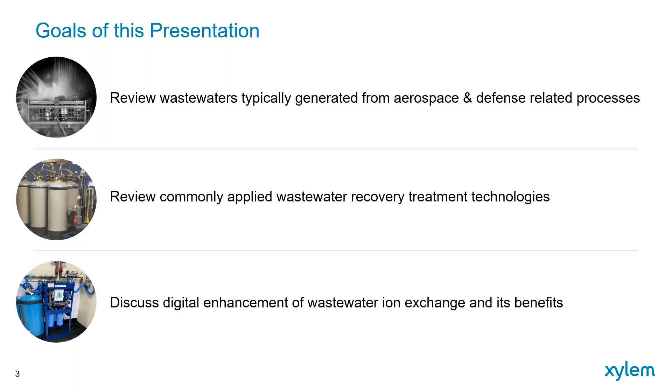So today, we're going to introduce Xylem and Evoqua. We're going to talk about where wastewater is generated in the aerospace and defense industries. We'll go into the recycling options for wastewater treatment and recovery, and from there to the digital connectivity platforms. Then we'll get a little deeper and talk about a few case studies and how we can implement these technologies and apply the digital aspect to it too. Finally, we'll wrap it up with a summary.

Xylem and Evoqua. Who is Xylem, and what can we offer you? How can we help you with your water needs? Back in May of 2023, Xylem purchased Evoqua Water Technologies, a company that both Chris and I came from, and this included our wastewater ion exchange services. With that merger, Xylem now has about 20,000 employees worldwide, and we provide water and wastewater treatment solutions, both services and equipment, to many different sectors. From aerospace and defense to microelectronics, power, and healthcare - really any sector with water needs, Xylem and Evoqua are able to help.

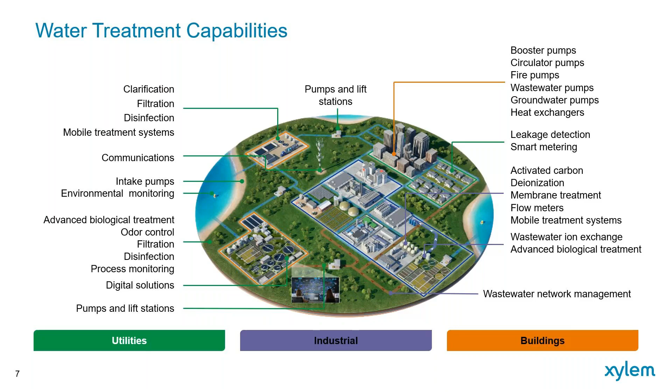I'll turn this over to Chris to get into the meat of the presentation. Thanks, Mark. Appreciate it. So we want to talk about some typical processes that generate wastewaters. We could have a whole webinar just on the different processes done within the aerospace and defense realm. We're going to concentrate on several processes that generate wastewater, use water, consequently dirty it up, and that wastewater then needs to be treated.

Metal finishing type processes are processes that you'll find very commonly within the aerospace and defense industry. Those processes can include electroplating, electroless plating, anodizing, etching, conversion coating, things we'll go into in just a little bit more depth in a moment here.

In addition to those typical metal finishing type processes, circuit boards are obviously heavily used within the aerospace and defense industries, and the manufacture and/or population of those circuit boards is also prevalent within the industry, generates wastewater, and is a target for wastewater treatment.

When you're dealing with a lot of metal parts, whether you're doing metal finishing, whether you're forming those parts, whether you're manufacturing them in some certain way, ultimately these parts, whether they be metal, plastic, or glass, they ultimately need to be cleaned. So cleaning in general and critical cleaning especially are heavily prevalent within the aerospace and defense industries.

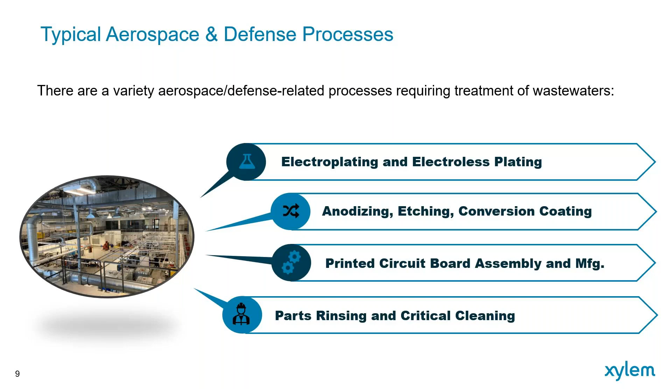Looking at metal finishing, which would include, for my purposes, electroplating, electroless plating, anodizing, basically those types of processes where you're depositing a metal coating onto a part, or you are affecting a change in the coating on the metal part, in the case of anodizing, for example.

Those processes involve a lot of different chemistries and heavy metals. In the aerospace and defense industry, you see a lot of use of cadmium, chromium, copper, nickel, zinc. There are several others as well, but those metals seem to be prevalent in many of these different processes, on the plating side, whether it be electroplating or electroless plating.

On the anodizing side, you're taking aluminum parts and actually changing the aluminum coating on the surface for better protection. There are three different types. One type uses chromic acid for anodizing, and the other types use sulfuric acid typically, or some combination, for conversion of this aluminum surface.

On the conversion coating side, you see a lot of chromate, which is hexavalent chromium, phosphate conversion coatings, and non-chrome coatings, which are meant to try to replace some of the hex-chrome coatings just because of toxicity concerns and wastewater treatment concerns.

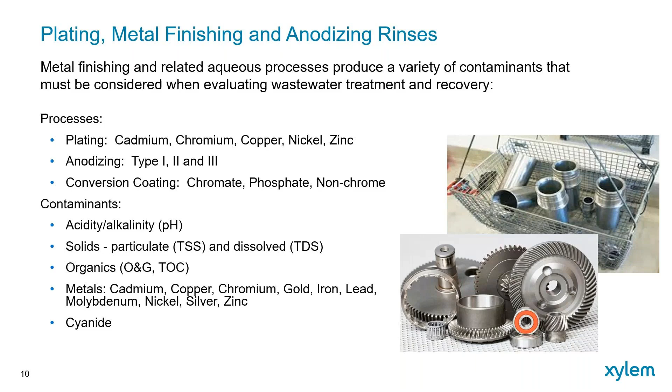Now we're going to talk about circuit board and critical cleaning rinses. That's where you have these assemblies, parts, or circuit boards that need some critical cleaning done to them. What is critical cleaning? It means they are cleaned to a high degree to minimize the amount of contaminant or soils left on them, contaminants that could actually impair how they operate or cause their useful life to be shortened.

Processes that we encounter on the cleaning side, for circuit boards as well as other critical cleaning applications, include immersion processes, spray processes, and ultrasonic cleaning. These processes are usually contained either in a batch or inline continuous type washer, where you'll have almost like a dishwasher in some cases, or a several compartment type washer with a washing stage and one or more rinse stages.

Contaminants that are generated from these would be solids, particulates, dirt, dust, debris, flux residue, things of that nature, and dissolved solids such as dissolved metals: lead, silver, tin, zinc, copper, things of that nature.

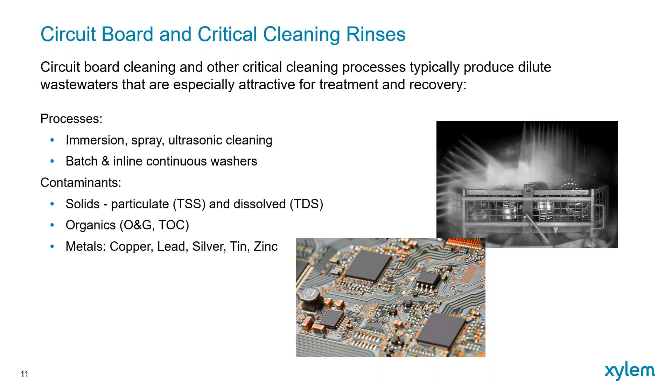So when we're thinking about water recovery, we want to understand why we want to do it, as well as just diving right into doing it. Many times, if water recovery processes are done strictly to save money on the water bill, you may end up being disappointed, depending on what part of the country or world you're in, especially depending on water costs and things of that nature. So you really have to think about why do we want to do this.

What do we want to do? Big goals of water recovery: you're trying to improve your sustainability profile. There may be a goal from corporate headquarters or facility management to cut back or reuse a certain amount of water in your processing. So improving that sustainability profile can be a goal.

You're also maybe trying to comply with local water volume or consumption restrictions. Your local water folks may say you can only have so much water for your facility, and if you're trying to expand or add new processes, you may run into a bottleneck where you can't get enough water. So you need to look at water conservation and/or water recovery.

If you're looking at compliance considerations, you can have both positive and negative effects of removing wastewaters from your overall wastewater stream that is being discharged. We'll talk about that in a little bit on a couple slides.

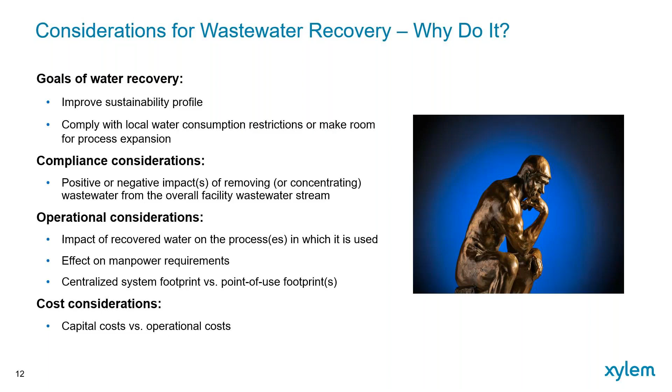How clean is clean? You want to look at the effect of manpower requirements, and you also want to look at centralized systems versus point of use. Do you want a number of systems at point of use locations, or could you consolidate into a centralized system that can feed out to the various points of use? And then again, there's cost considerations—capital costs versus operational costs for these types of systems.

So when we're looking to proceed, we want to think about what we're going to do. We're looking at doing some wastewater recovery. We want to identify any drivers and constraints, what the priorities are—it goes back to what I just talked about. What are the goals? What are the reasons for doing this? Do you have priorities for water, energy, or chemical consumption reduction?

Do you have any restrictions in money—capital expenditure versus operational cost? And do you have any corporate or facility sustainability objectives that doing this would help you achieve?

So you get past that, you say yeah, we want to look at this further. We want to determine where any water that you recover could be used—in other words, what impact it might have on whatever process it's going back to. So what processes might you be able to use that recovered water in—the exact same process it came from? We see that most often, or other processes within the facility, like cooling tower feed, could also be a consideration.

Then you have to understand what water quality you need from this recovered water for those processes, and what volumes and flow rates are required for those applications. So you end up doing a water balance, shall we say.

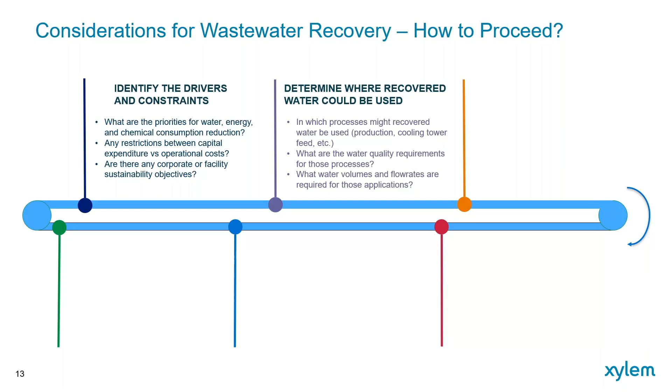Then you take it to the next step and look at the existing wastewater streams. What processes generate wastewater? What are their volumes and flows? Are they commingled or separated, segregated? Can you segregate them if required? Sometimes that can make the treatment process much easier.

Then you've got these target streams. Now you want to characterize them—look at them, analyze them, determine the constituents and background chemistry of each. Are there commonalities between these different wastewaters that you could combine with no issues? Might any of the constituents be problematic for certain processes or potentially jeopardize compliance, for example?

From that information, then you're going to develop your solutions. What technologies are appropriate—we're going to talk in a little more detail on a couple of them. Do you want to look at point of use or combined recovery, or both? Depending on the types of processes, do you need to do bench or pilot scale testing? Typically, we always recommend bench testing, and we do that at our facility in Minnesota.

What is the footprint for each required solution? What are the anticipated maintenance needs? What levels of controls and alarms do you want? Do you want to integrate with your building management system?

In the end, in goes the solution. That doesn't mean your work's over. Now you look at it and say, okay, is it delivering the expected results? How can we optimize it? If need be, can we expand it?

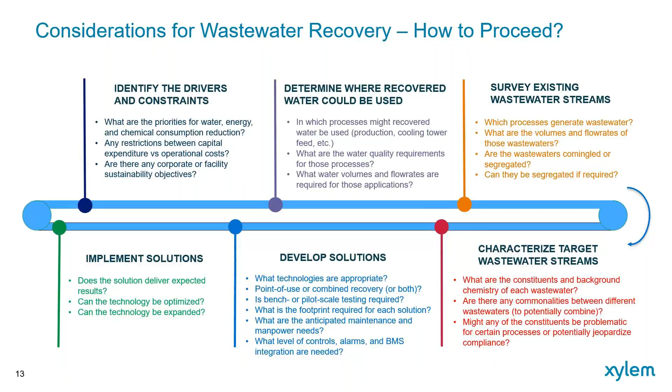All right, let's talk a little bit about wastewater treatment and recovery, and what options exist for wastewater recovery. We'll hone in on a couple specifically, or a few.

There's ion exchange resins, which take out metals and/or total dissolved solids. Carbon filtration, old as the hills technology, just like ion exchange, can remove organics and total organic carbon. Reverse osmosis, a membrane process, can remove total dissolved solids. Good old filtration, whether it be by media, bag, or cartridge, can take out particulates or solids that you don't want to get into your following processes, such as ion exchange, carbon, or reverse osmosis. And ultraviolet light is used to control organics or control bacteria.

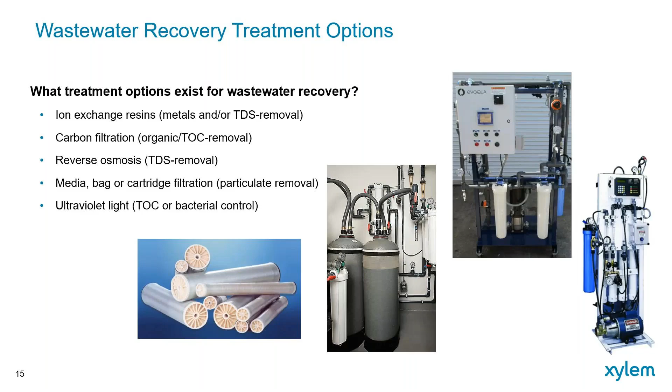Let's talk a little bit about ion exchange and carbon. It's a very old as the hills technology, very common. Ion exchange resins are just really small plastic beads that are functionalized. They're meant to hold on to one ion, and when you run your wastewater through it, it exchanges the ion it's holding on to, such as acid or hydroxide in this diagram, for whatever contaminants are in the stream. That diagram indicates copper sulfate going through cation resin and anion resin. The cation resin removes the copper, puts acid back into the water. The anion resin removes the sulfate, puts hydroxide back in the water, and the result is purified water.

So the resin will remove dissolved ionic contaminants. It'll take metals and other contaminants down to ppb levels, and you can produce some pretty high quality water with ion exchange resins, up to 18.2 meg, or just call it 18 meg. There you're talking TDS, total dissolved solids content, of about 0.03 ppm. So pretty darn pure. Carbon adsorption is used really to remove organics, TOC, and can also remove oxidation compounds such as chlorine or hydrogen peroxide.

You'll see ion exchange and carbon used both on the front end of processes, to clean up water before it's used in the process, and on the back end, to clean up water after it's been used in the process.

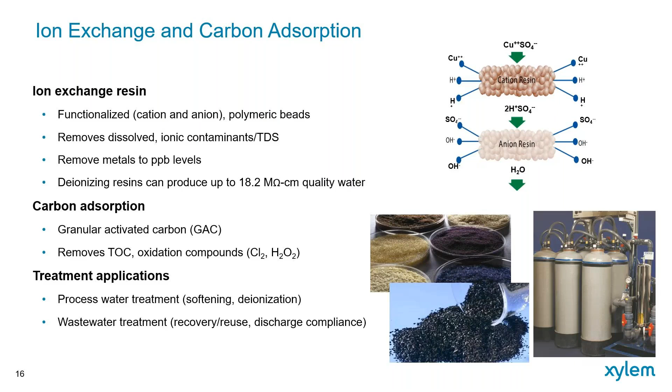Reverse osmosis is another common technology. It's not as old as the hills, but pretty darn old, been around for a while. It uses a polymeric membrane - basically a physical barrier. It's a separation process. You can see in the diagram up top, your water goes in, you apply pressure, and it forces the clean water, if you will, plus a minor amount of constituents, through that membrane, and that comes out as your product, or what's shown there as your permeate.

The membrane doesn't allow certain things to pass. The majority of your contaminants, for the most part, will not pass through that membrane, and those concentrate up in what is called the concentrate or reject stream. Membrane pore size is extremely small on these membranes, such that it can retain ions such as sulfate and chloride and things of that nature.

RO will remove most TDS and other contaminants. It'll take out typically about 95% of the total dissolved solids, up to 90% of organic carbon, up to 97% of silica, and virtually all bacteria. Again, you end up with a clean stream, the permeate or the product. It could be 10 microsiemens or even under, depending on the quality of water going in. And you have to remember you do or will have a concentrated or dirty stream, the reject stream, that may or may not need to be treated.

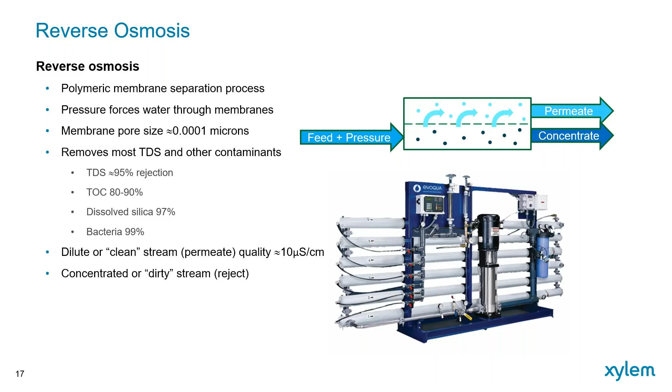There are other filtration type processes, speaking of membranes, that are used in wastewater. Microfilters have a larger pore size - large is in quotes in this case - about 0.2 microns. Usually a microfilter is used as a pre-treatment step for reverse osmosis or for ion exchange recovery. Microfilters can be used to replace clarifiers, for example, if you have a conventional precipitation system.

On the ultrafiltration side, ultrafilters have membranes that will filter down to about 0.02 microns. They'll remove turbidity, particulates, bacteria, pathogens. You'll see a lot of these in some oil and grease type separation applications, and again these are usually used with disinfection technologies for water recovery on the potable side. We don't see them as often on the wastewater side, but they can be used and ganged up with other technologies.

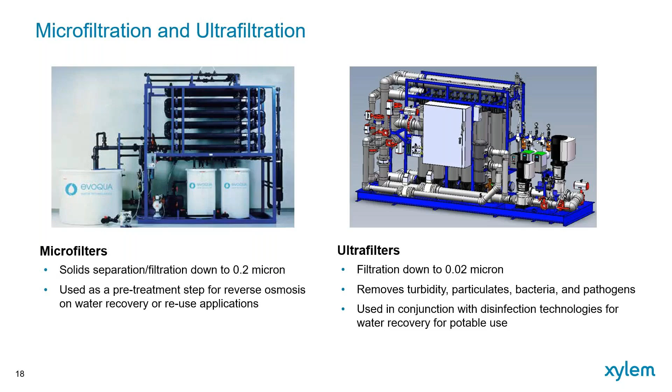Filtration and UV or ultraviolet light treatment. Filtration removes the solid particulate contaminants.

You can see there you've got cartridge filters. You may be able to use bag filters or media filters, which was shown in those tanks in the upper right corner of that picture, where you actually have material or media equivalent to sand, or perhaps even finer, that filters out particulate contaminants, and then those are removed via backwash. Filtration is important because it keeps those things out of your ion exchange resin, out of your reverse osmosis membrane, out of your carbon adsorption media as well.

Those things, ion exchange and carbon, they can work for filtration. You do not want them to, because whatever you put in there is ultimately going to come out the backside and cause problems, if they don't cause problems just by plugging those things up. So filtration ahead of IX or ahead of RO is typically a must.

Ultraviolet light, again, there's a couple different wavelengths you can use. That's usually to break down TOC or to break down biological activity. When you do use UV, you usually follow that with a submicron filter, trying to get out those very fine particulates or microbes that have now been dealt with through ultraviolet light.

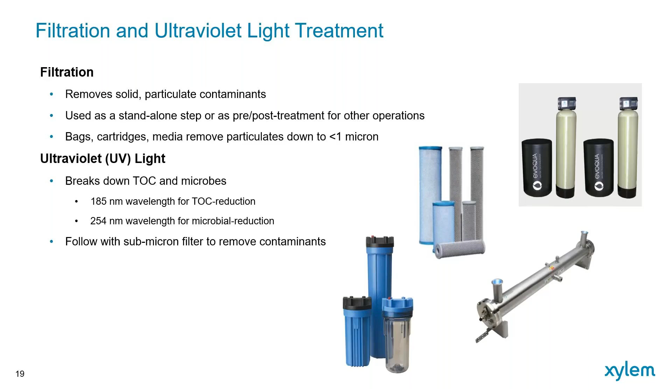So if we're looking at recovery or just wastewater treatment in general, there's some rules of thumb. Are we looking at media? When I say media, I'm talking carbon or ion exchange resin or something similar. When I talk equipment, I'm talking pH adjust systems, precipitation systems, RO, things of that nature.

So usually when you have high metals, high volumes, you're looking at an equipment type solution. When you're talking low concentrations of total dissolved solids, that's where media really shines. You're looking at pH or suspended solids, like I mentioned, you're talking equipment type solutions.

There are benefits, pros and cons, obviously, of any type of technology. Media, which we are focusing on really in this presentation, typically has lower operator attention required to interact with them, lower upfront expense when you're talking media type solutions, and usually a smaller footprint.

Doesn't mean media is the solution for everything. Equipment has its place, and oftentimes you've got a blend of equipment and media together to make the right solution. When it comes to dilute waste streams, however, media, ion exchange, and carbon are usually the best solution.

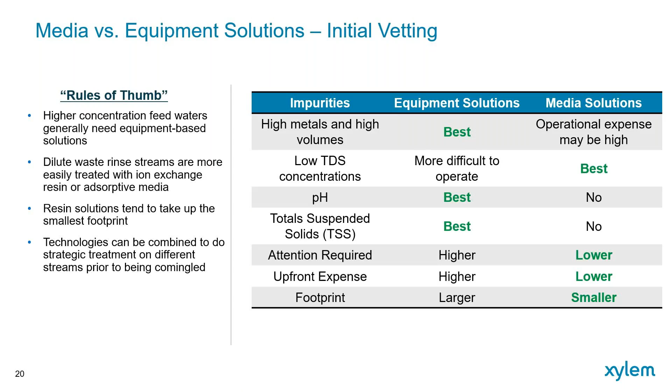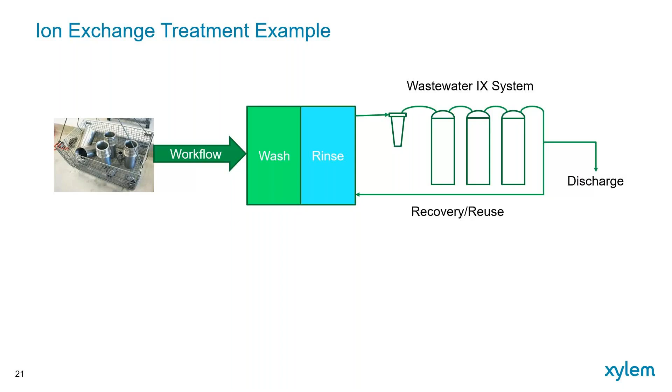So in this case, you've got wash and a rinse. Here's where you would employ wastewater ion exchange. You can do that either for recovery of that water back to the process, or discharge treatment if you need to do that as well for discharge to your local wastewater folks who will receive that wastewater and treat it further.

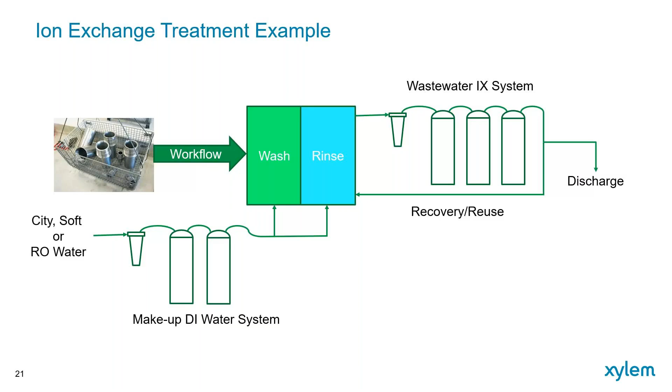When we look at ion exchange on the back end, you really need to make sure you're doing upfront water treatment as well. Upfront water treatment is common in so many different processes, especially in aerospace and defense, where you need a higher quality of water to be used in that wash process, in that rinse process. So here we just show a typical ion exchange makeup DI water system, and then a system on the back end to treat for either recovery or for discharge.

You would employ reverse osmosis similarly. Again, you've got to remember with a reverse osmosis, you do have the permeate or product stream, the clean stream that you would use back in your process, and you do have a discharge stream.

Depending on the type of water quality you need, as we talked about several slides ago, you need to understand what type of water quality you need going back into that rinse. Typically, whatever water quality your makeup system is producing, that's usually what you're going to want to see on the back end. Or that may be specified by a mil spec or something like that.

So if you have reverse osmosis, like I said before, maybe you're making 10 microsiemens water as your product. If you need to clean that further or make that even more pure, that's where you can install a wastewater ion exchange system. We can't, of course, forget about the discharge.

I mentioned before, there's considerations where you have to understand, if I'm putting in a process, what are all the outputs going to be? If there are metals going in that concentrate up that are now over your discharge limit, well, you might have to remove them. You could use ion exchange or a media type process for that, or you might end up with both things. So as you can see, there's a lot of different considerations when you're looking at doing recovery, water recovery.

There's a lot of different, not necessarily technologies, but iterations of those technologies that you could use to effect water recovery for your waste stream or waste streams if you have a combination, for example.

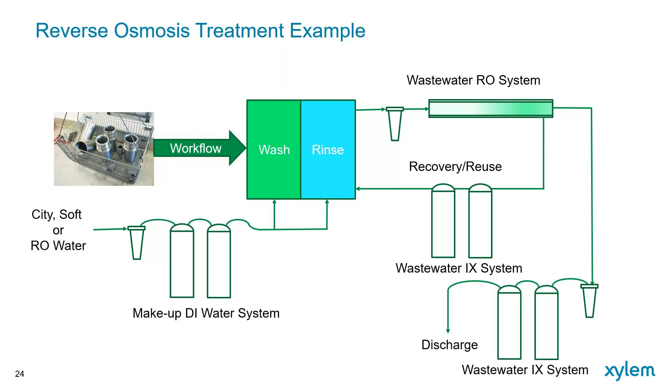Now let's talk about this digitally enhanced wastewater ion exchange. First off, when I talk wastewater ion exchange, what is it? From our perspective, wastewater ion exchange is a service where portable ion exchange vessels or adsorptive media such as carbon or other media are supplied for treatment.

These vessels are leased. They go onto the customer's site. The customer uses them, and when they are spent, they are removed from site and regenerated or rebedded off site back at our Minnesota facility. So wastewater ion exchange itself is this service-based system that uses leased media tanks.

Again, from our comparisons before, ion exchange or media type treatment does tend to minimize system footprint. In this particular case, you're eliminating any on-site handling or regeneration. Doesn't mean you can't use ion exchange on-site and regenerate it on-site—you certainly can. This is just a different iteration of that type of process, and it eliminates that type of on-site handling.

The media, when it does go off-site for handling, it goes to a RCRA-permitted facility. That facility has all the necessary permits, knowledge, and expertise to handle things appropriately—handle the spent resin, as well as handle the metals that come from that resin, because those metals ultimately end up getting recovered.

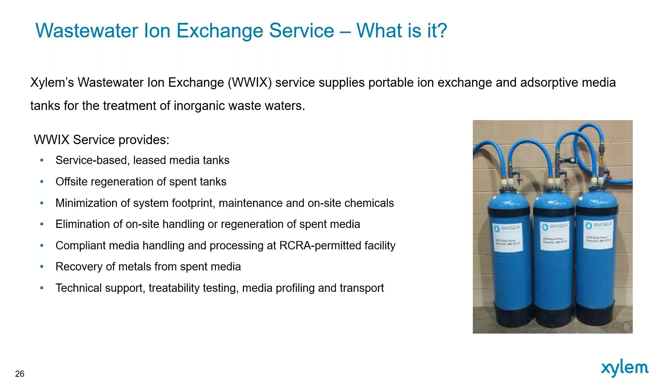So, Water One WX services. When we're talking digitally enhanced wastewater ion exchange, that's what we're talking about—this service called Water One WX. It combines that wastewater ion exchange service with remote monitoring capability and data logging capability for those reuse and recycle type systems. Again, ion exchange in general targets lower TDS waters, and in this case, that's highly appropriate for this type of product as well.

So what this service does is provide that continuous, consistent recovered water quality that's monitored 24/7, 365 days a year by the Digital Command Center. The system will alert for water quality excursions, other things as well, such as high pressure, such as from filter obstructions, leaks, things of that nature.

This service basically provides a streamlined operation. For example, when you're running a wastewater ion exchange system or any ion exchange system, you need to understand when your tanks are spent. Some folks do that on time, some by analyzing what's going in and what's coming out, and some do a combination of that. Others will use quality indicators such as quality lights, conductivity meters, resistivity meters.

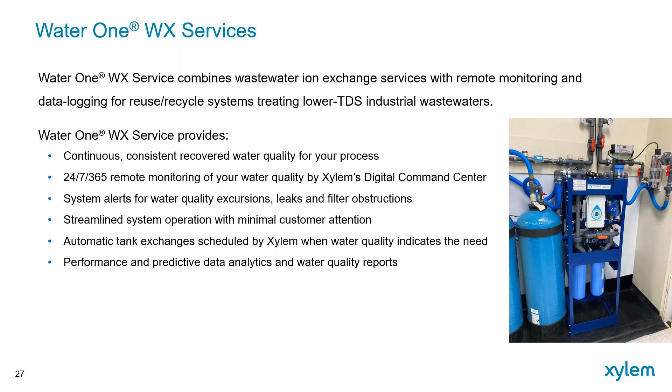In addition to just gathering this data, it also stores a lot of this data, which we'll talk about on the next slide. And all this data, or a lot of it, can then be put together in water quality reports that you could use, say, if you have an internal audit or something like that. If you're NADCAP certified, for example, and you have internal audits or audits by external customers, you would have the ability to look at historical water quality data through these reports that are generated.

So this unit directly measures and logs feed conductivity, effluent resistivity from, say, a configuration of one carbon and two mixed beds, which is extremely common—it would monitor the resistivity from both of those mixed beds, monitor temperature, pressure, pressure differential across the pre-filters, and the volume of wastewater processed. It uses that information to calculate things such as average flow rate, average feed conductivity, and through the AI or algorithm, determines how much of that tank capacity is left, giving an idea of when the next change may occur.

So there's a lot of data that it collects and uses, and a lot of the data shown there is an example of the dashboard that you'd typically see.

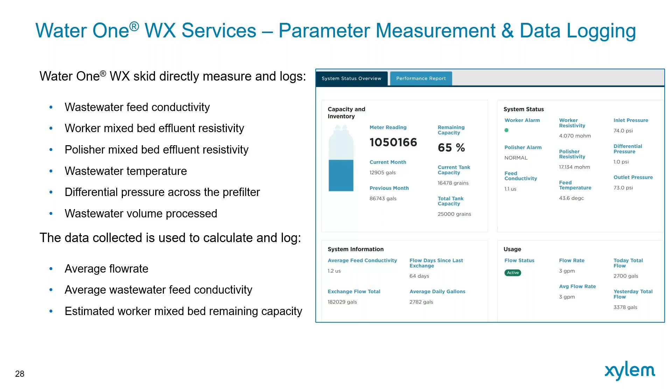All right, let's talk a few case studies. We're not going to talk all on the digitally enhanced, but just a few different aerospace and defense case studies.

Chromate conversion, chromate conversion coating. It's one of the most common processes, and this could be, in addition to chromate conversion coating, which is putting down a chrome coating over metal, usually for corrosion protection. This can also extend to chrome electroplating as well as chromate anodizing, or I should say chromic acid anodizing.

So this particular case, you had a manufacturer of large aircraft structures. They're doing chromate conversion coating on a number of aluminum components because the chromate conversion coating imparts some corrosion resistance and also provides a nice surface for the addition of paint if necessary. They were having issues, being fined for some contaminant exceedances in the discharge to the city.

So we looked at a bunch of different wastewaters. When we look at a particular situation, we don't just usually look at one wastewater unless we know that one wastewater is the problem area. We'll look at a number of wastewaters that could be contributing, in our lab in Minnesota.

In this case, we identified several rinses that could be successfully recycled using essentially ion exchange resin. Put in a small demonstration system on the recommended rinses. Worked very well, showed that wastewater ion exchange was very effective in meeting treatment and recovery water goals. Went to a larger system then, once that smaller system had proven itself, went to a larger 60 cubic foot vessel system with cation and anion exchange resins, treating up to 150 GPM of those chrome-bearing wastewaters.

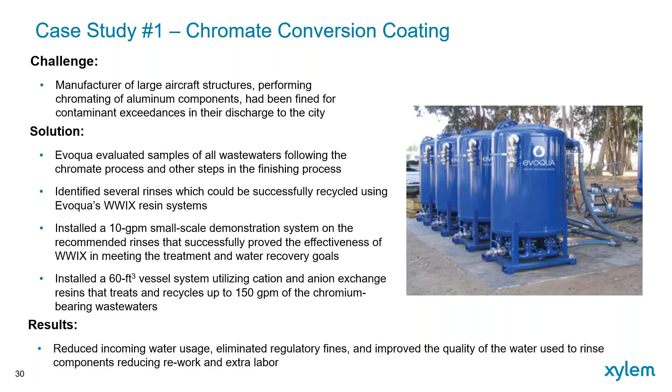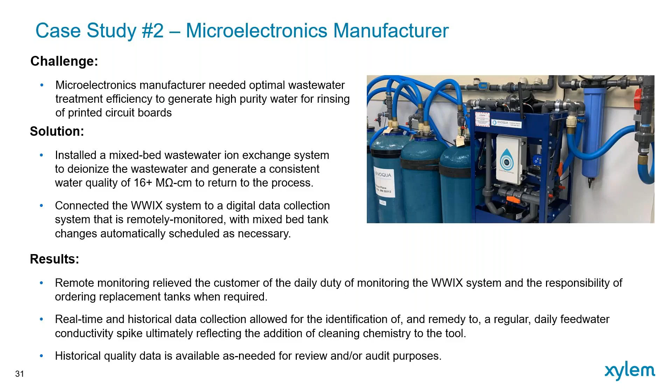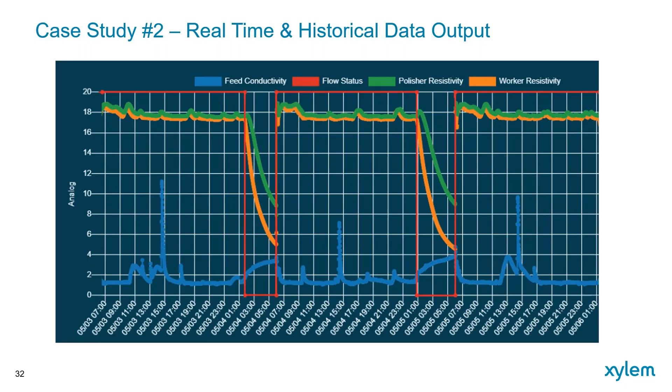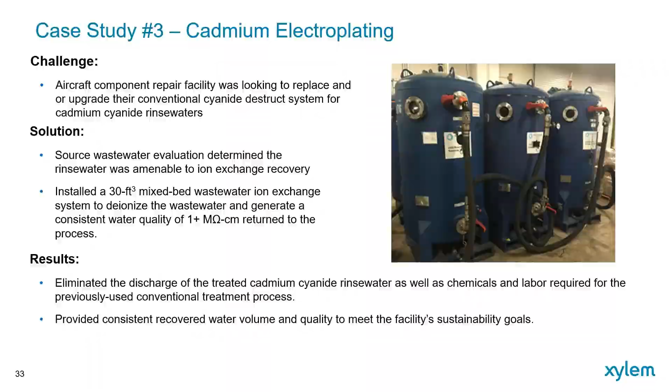I'm going to turn it back to Mark, and he can summarize.

All right, well, thank you, Chris. A lot of information there, and what I will do is go through some of the highlights of what you talked about, and then we'll open it up to questions. So aerospace and defense operations, there are many different types of wastewaters, and many of those are applicable for recycling or water recovery. Some of the components of that would be wastewaters that have low conductivity, low TDS.

Equipment and media solutions, how do we determine that? What's going to work best? We always want to look at what's the concentration of the metals, and also how much water is being generated per day in gallons, and we look at those in combination to see how we can recover it and if it can be recovered. And then, as Chris said, there are many different technologies that can either be standalone when we employ that water recovery, or they can be mixed and matched as we have there.

There are a number of things to consider when contemplating wastewater recovery, and some of those are sustainability. A lot of companies these days have sustainability drivers in addition to just cost, compliance, and operation standpoint. They want to be able to meet these goals and show that they're good environmental citizens. So that's more and more important these days. But of course, cost and compliance and operations are right up there with things that go into the mix in the equation.